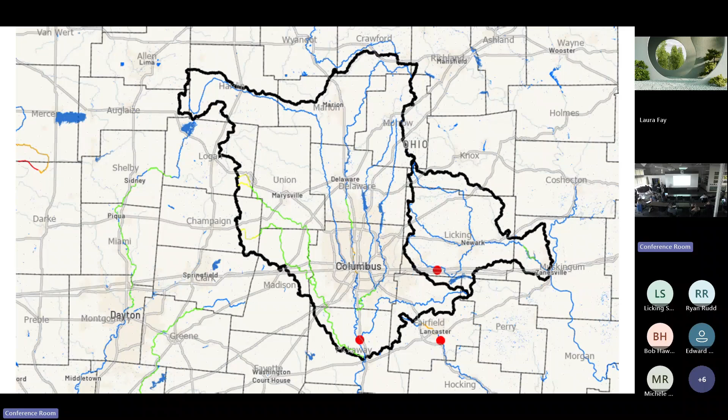Well, these are the projects that we've funded so far. I'm not going to get into the details on these various projects right now—glad to answer questions—but they're all floodplain reconnection projects. We've got 2 off-channel wetland projects, and a quarry reconnection project. These are great because they're scoring super high; they've got a million different benefits, and importantly, they're easy to sell from the volumetric benefit standpoint.

But that is not all that works. The reason these are the ones that have been funded is because these are the ones that people are bringing forward. We've got, frankly, a small handful of folks taking advantage of the opportunity, and we've got $4 million out in two grant cycles.

Which, by the way, it's worth stepping back and saying that if you think of some other grant opportunities, like the 319 program, it's typically $3 million for the entire state in a year. Or H2Ohio, before they pulled back from the Ohio River Basin, that was $5 million for the entire Ohio River Basin. This is just Central Ohio right now, and we just did $3 million in this last fund. So it's a big opportunity, and we're expecting it to grow.

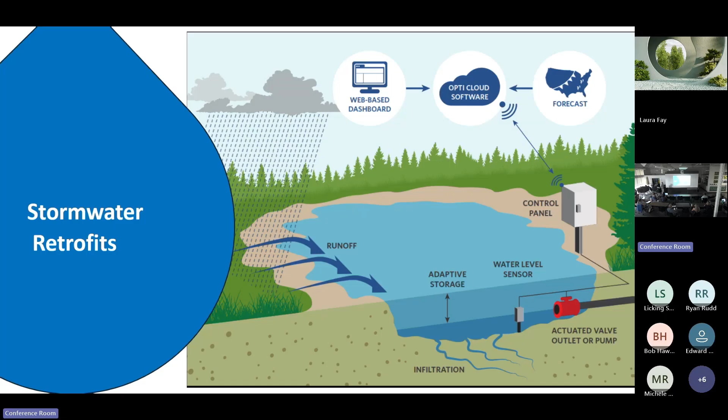Can they be done cheaper than that? I hope so, I don't know. But the detention basin retrofits that I'm used to working on, from the passive side, are a fraction of that, right? These can involve something as small as bolting a steel plate under the low flow orifice to restrict that, making a few saw cuts like we see on this control structure right here. Bob will talk a lot about that.

Obviously, whenever possible, we want to build a habitat, right? But to the extent that we can do these for, say, 40,000 instead of 400,000, I mean, I've got to think we can just fund these all day.

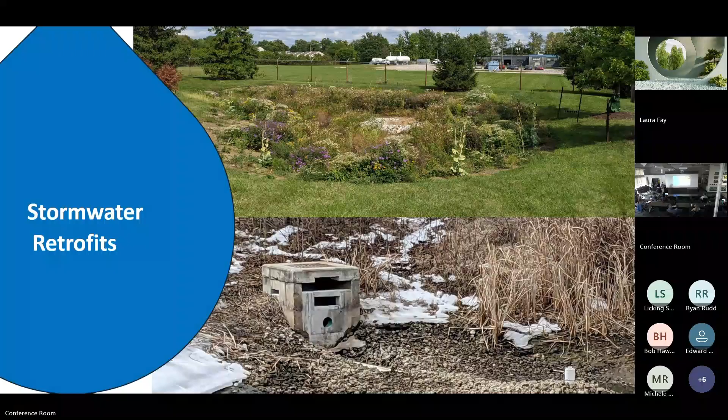So, my message here is let's do this, but let's also think big. So currently, if you read the NOFO, the minimum award that we're considering is 50,000.

Now, to be frank, that might be kind of hard to say. Might be hard to convince a corporation to invest their time on something so small when many of these folks are looking for hundreds of millions or billions of gallons of volumetric thing. And frankly, it's hard for me to sell internally to spend that much administration time.

The smallest award we've given out so far is 700,000. I'm not saying it needs to be a million dollars, but I'm saying let's think big. Let's not think about retrofitting a single detention basin. Let's think about retrofitting every detention basin in an industrial park.

And I'll just step back. I think a lot of folks like to do the detention basin at the school or the municipal building because it's easy. We know these people, we can go and we can talk to them.

In my former role, I spent all my time trying to work in one square. My goal was to figure out this question: how much does it take to mitigate the impacts of hydrologic alteration in a small area?

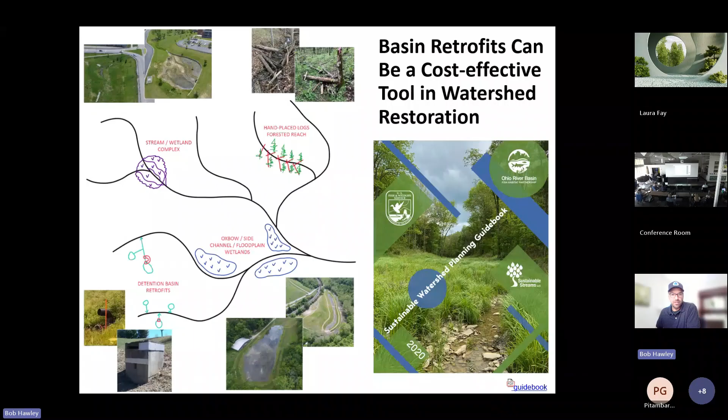And we've got this guidebook that we developed with U.S. Fish and Wildlife that goes into that. But today we're going to focus on the stormwater basin retrofits. And so the first question is why?

The history of stormwater management is that it's not been protective of aquatic biodiversity. It's not consistent with the goals of the Clean Water Act. So you basically take an undeveloped watershed historically and you develop it, and the pattern up until very recently was that you very quickly lose that biological integrity that you had prior to development, especially if it was a forested watershed.

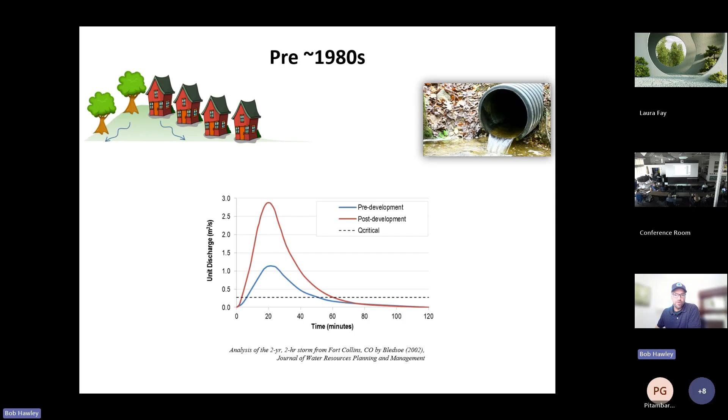And that's because of how we manage stormwater as civil engineers, stormwater managers. So you take that pre-developed hydrograph and you add a bunch of impervious surfaces, and you see the runoff volume and the rate of that discharge is a lot higher. It's a lot more volume, a lot higher than the peak discharge of the pre-developed condition, and that led to a lot of flooding.

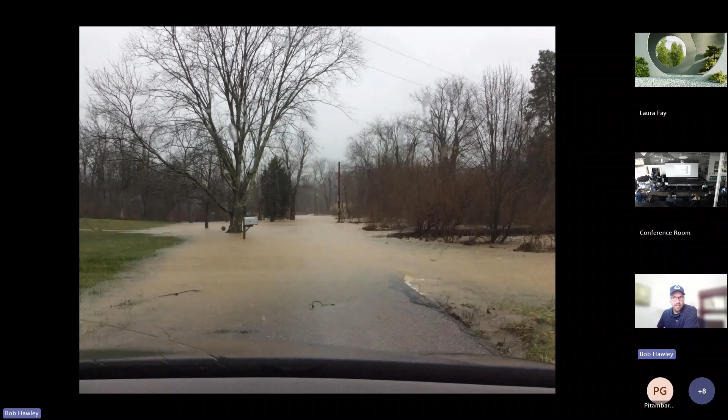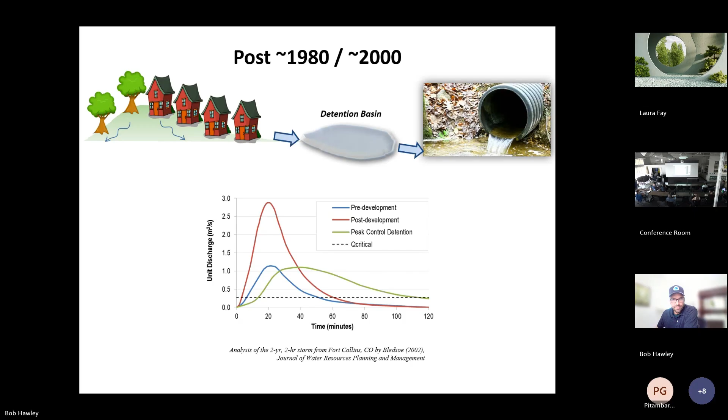Civil engineers said that's not good, and stormwater planners, conservation folks said this isn't good either, to have flooding. So what we did in the 1980s to about the 2000s was we started implementing peak control detention, where you've got extra volume running off, but you route that extra volume into a detention basin, and you don't let the peak discharge after development exceed the peak discharge pre-development.

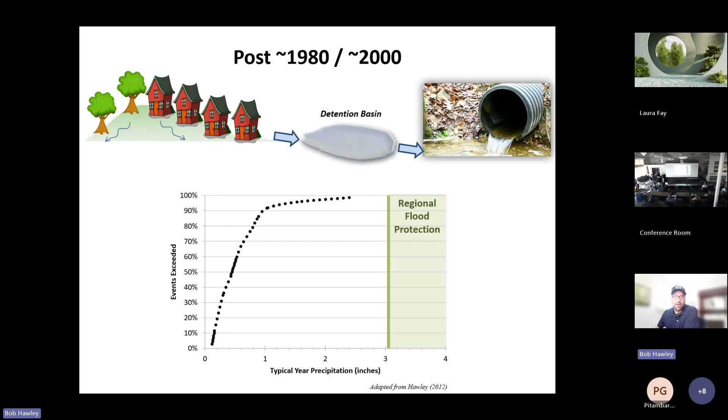In Northern Kentucky, that volume is about 3 inches. In Central Ohio, the 2-year storm might be a little less than 3 inches. But in general, pretty much all the storms in a typical year have very little attenuation. They're going right through the detention basins.

That led to things like this, where this is a developed watershed. The industrial facilities all have detention basins, but we get 0.3 inches in an hour and the stream looks like this, because the detention basins collect the stormwater but route it straight through. You can imagine how much damage that caused when you hit that on repeat - every time you get 0.3 inches of rain, your stream looks like this.

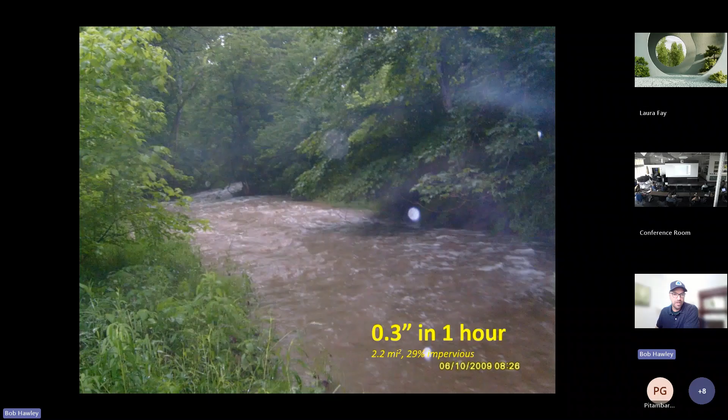The other thing is, when we don't really treat the runoff from these smaller initial storms, we have what's called the first flush, where you're getting lots of stormwater pollutants that go right through these detention basins and end up in our streams.

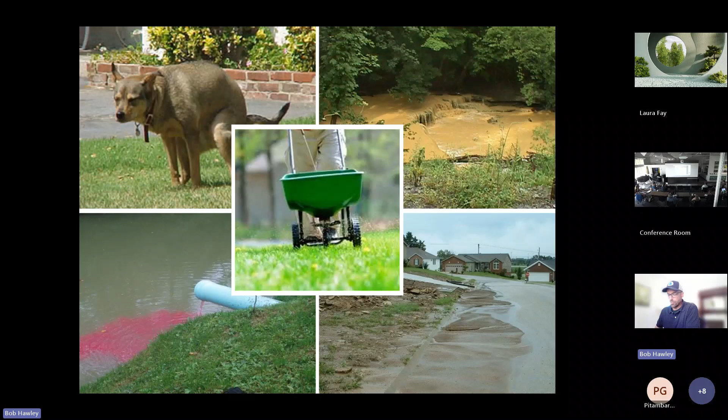Beginning in the 2000s in different communities through about 2015 or so, folks started implementing water quality volume criteria, where we said let's take a reasonable amount of rain, maybe the 80th or 90th percentile in a typical year, and make sure all of those events get routed through some sort of water quality BMP. For the large part, developers still have to do flood control, so they're still building detention basins.

So instead of a regular detention basin, you make it an extended detention basin with a sediment forebay and an underdrain release structure that slowly releases that water, makes it go through some gravel, and you get that treatment of the first flush.

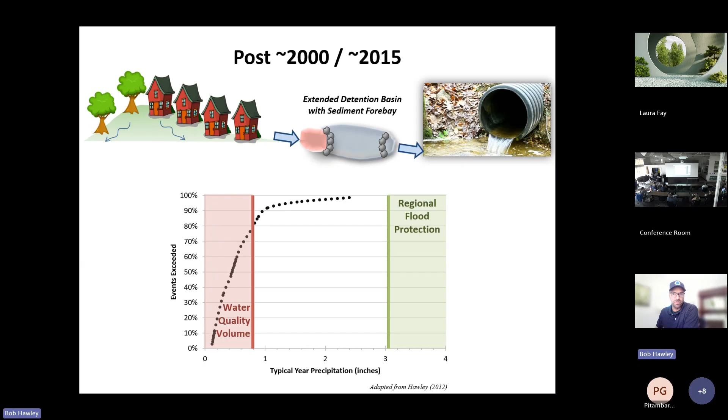You can take these and make them really pretty - you can make bio-infiltration basins with lots of nice native plantings and so forth. That was kind of the trend in the early 2000s.

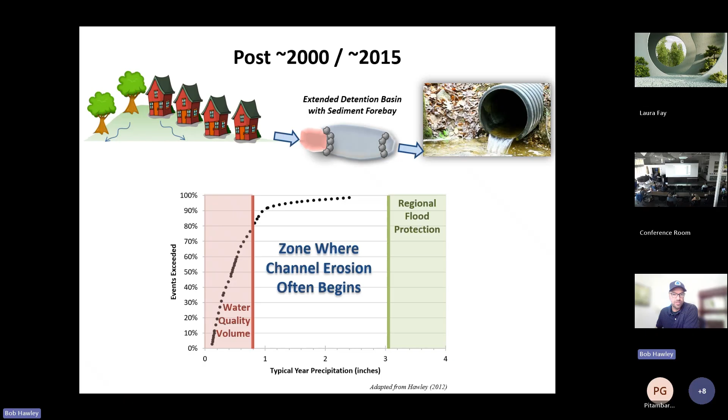But what we notice is that we've still got this gap of storms above 0.8 inches of rain but below 3 inches of rain. It'll vary in Central Ohio, but you get the idea - these storms are relatively unmanaged, and this is often where channel erosion begins.

That brings us to the critical discharge for stream bed erosion. This is the threshold discharge when the rocks on the bottom of the stream become entrained, they become mobilized. We've been studying this for a long time.

It's all the way back to like the 1950s. We've got a really good handle on what flows cause erosion for different sized particles. And this is a really important flow for not only erosion, but also the bugs that live on the rocks. A lot of those bugs have evolved to have life cycles that mimic the natural frequency of the mobilization of these rocks.

This dashed line on this graph represents that critical discharge, from one of the first papers on this idea back in 2002, from a Colorado study by Brian Bledsoe.

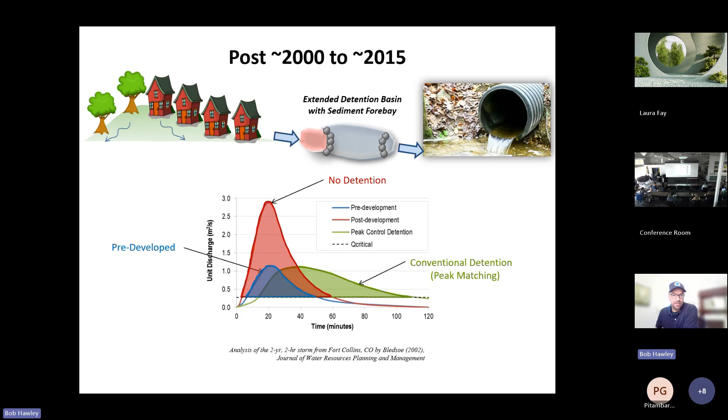What you see is this is our 2-year storm. We've got our 2-year storm without detention, and a 2-year storm with detention. And you see that if you look at that time and the amount of flow above that critical discharge, we have a lot more duration of those erosive flows when they occur.

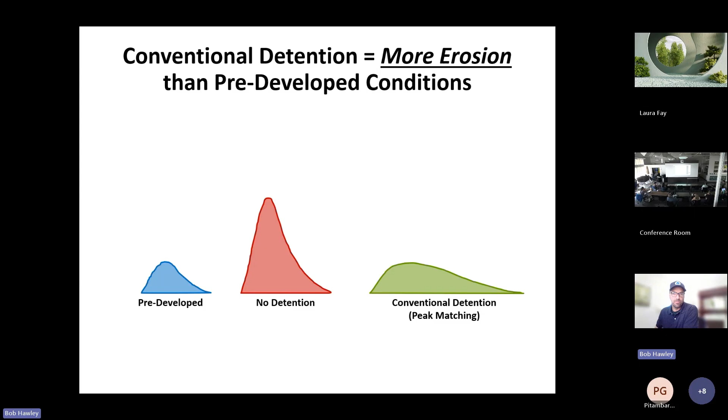And then we also have a lot more frequency of erosive flows. So conventional detention typically means more erosion than pre-developed conditions.

That can lead to stream bed deepening and widening, water quality impacts, and biological disturbance. So you start to mobilize the pebbles on the bed, and you do that over and over, and they're not replaced by pebbles from upstream or cobbles. You have the original stream bed, and then basically you've just made the stream deeper because you mobilized the particles that were on the bed - they're gone, so the stream gets deeper.

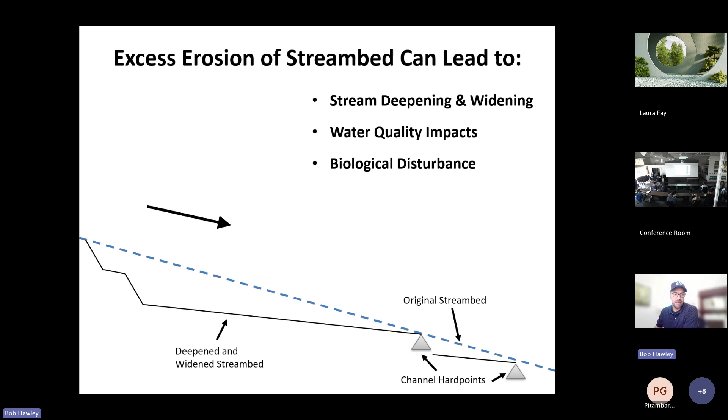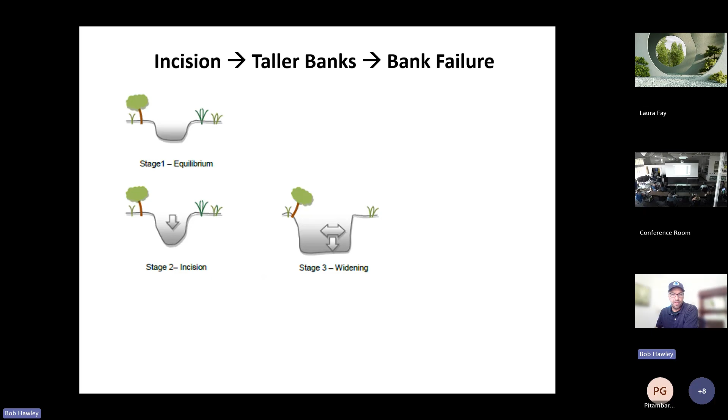That's when you lead to head cuts and all kinds of channel degradation trajectories where you get incision, and then the banks become so tall that you have widening because of geotechnical instability and mass wasting. It takes a very long time for a stream to recover, to the point the banks become so wide that the stream can no longer transport this material.

Benches start to redevelop and get colonized by vegetation, and you can recover to a new equilibrium. This is a natural process, but it takes a long time. And when you've got unnatural hydrology, it can take a lot longer.

So the point of these retrofits is, let's solve the root of the problem, which is too much erosive power in our flow regime. Let's try to restrict those erosive flows and see if we can induce a geomorphic recovery.

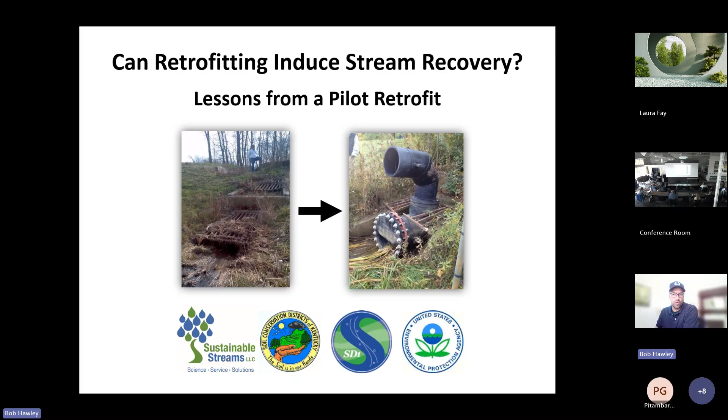So this was the first retrofit we did with a lot of partners, including US EPA. We basically took a 24-inch opening on a conventional detention basin and restricted it down to about an 8-inch opening. We gave it this bypass so that we have similar flood control performance for the big storms, like the 100-year discharge. Here you see it in action, where it's a simple change to the outlet structure.

You see the ponding just gets barely above the top of that pipe. Without the retrofit, this storm would have went right through that 24-inch pipe, but that 8-inch opening restricted the discharge.

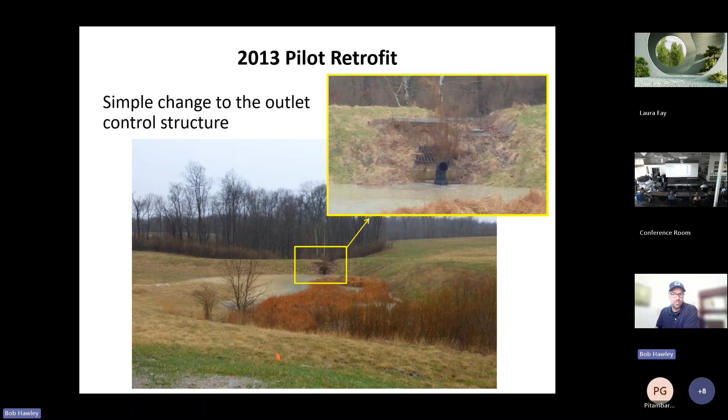So the idea here is you restrict as many flows, as many storms as feasible, below that critical discharge. And you need to know what the critical discharge is for your community - we can talk about that.

But for this first study, what we showed is for the pre-retrofit condition, even the 3-month, 6-month and 1-year storm, and all the way up, but even the 3-month storm was exceeding that critical discharge. And that means, again statistically, once every 3 months, we're hammering the pebbles on the bed, we're disturbing the macroinvertebrates.

Post-retrofit, we got the 3-month, 6-month, and 1-year storm to be released below that critical discharge. And the 2-year storm still exceeded that critical discharge. So it's back to a more natural disturbance frequency.

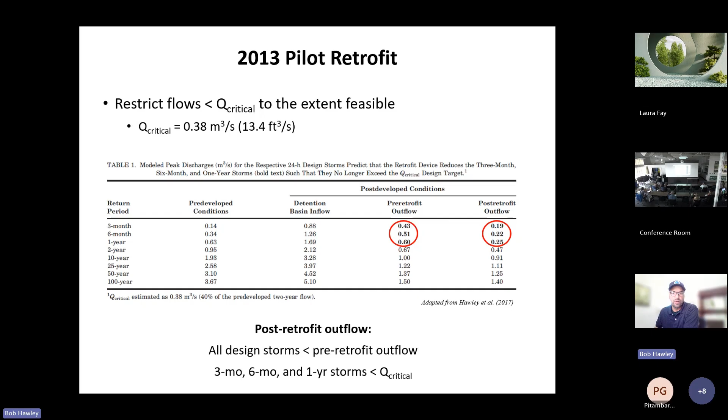Here's some monitoring of that. We've got basically our retrofit, and we call this the spur. We've got an upstream control site where we didn't have any retrofits, and then we have our downstream site that combines the flows from the restricted retrofit stream and the control site.

And what we see is not only are we making the high flows less flashy and reduced power, we're also extending the duration of base flows.

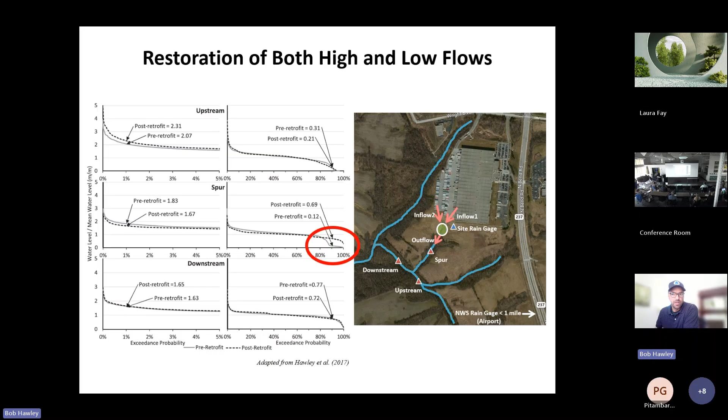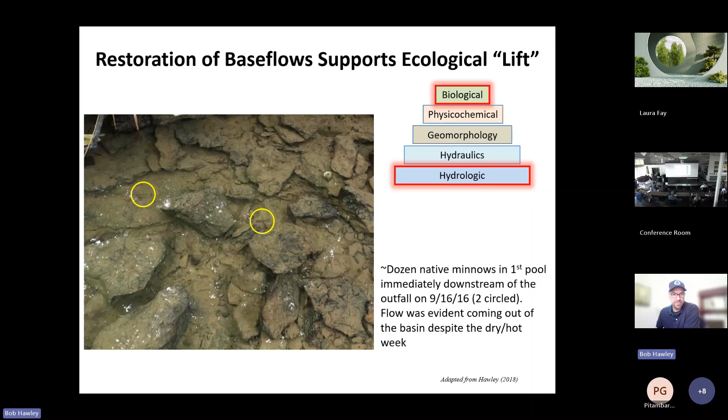So we're prolonging the flows during dry weather as well, by not letting the water just rip right through. And that led to fish in these pools that we had never seen fish in these pools before. So we're keeping these pools wet enough to support fish. That's obviously an ecological lift from a fish community standpoint.

We measure the bed material, and we actually see aggradation, which means we're no longer sending the pebbles downstream, but we're actually accumulating sediment along the toes of these banks. Whereas we see continued coarsening at the upstream control site.

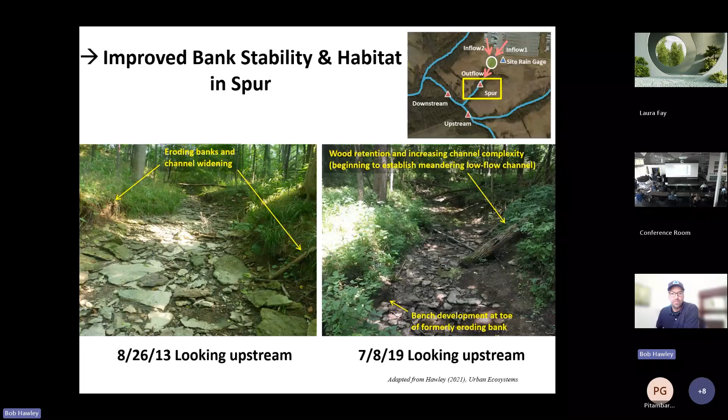Pictures kind of speak a thousand words. This is the photo of the spur looking upstream. We see bank erosion beforehand and channel widening, and then after the retrofit, we see vegetation of the toes of those banks and more of a low flow channel developing here. That was our spur site.

At our downstream site, we again see bank erosion before the project, before the retrofit. You see this tree with exposed roots. After the retrofit, the tree no longer has exposed roots. We see this bench that's developed along the toe of that bank, and it's getting vegetated. So that's really indicative of a geomorphic recovery.

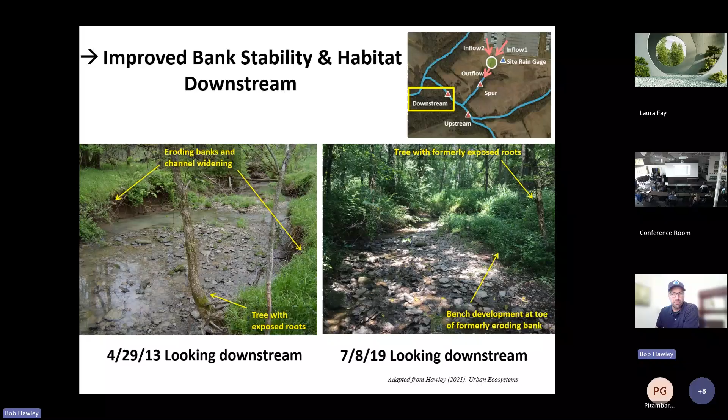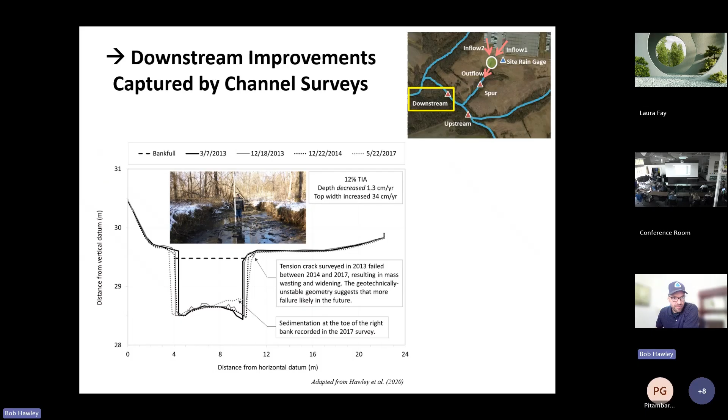If you don't just want to believe the pictures, here's some survey data that shows, before the retrofit, we saw all this widening. After the retrofit, we see this bench development, bar development that again was colonized by vegetation.

Our spur site is on a trajectory of recovery, as well as our downstream site. So we didn't retrofit the whole watershed, but we controlled enough of the total imperviousness for the whole watershed that even the downstream site saw benefits.

So we went from poor habitat to average habitat without doing any in-stream work, only touching the flows. We basically induced this recovery from degradation, down cutting and widening, back to aggradation over 4 or 5 years, and then that aggradation is stable long enough that vegetation can colonize it. So more of an equilibrium condition where we got stable vegetated benches.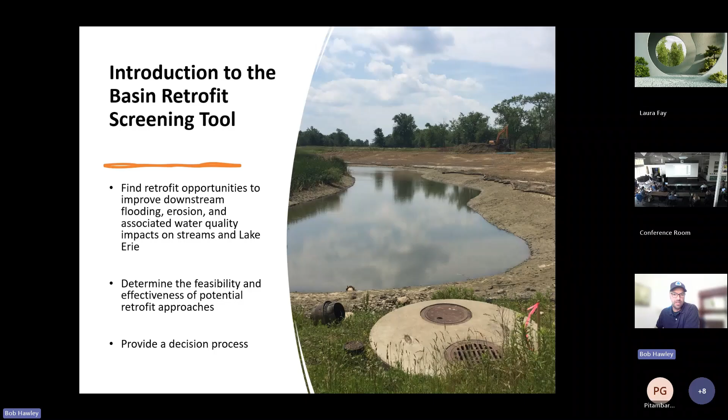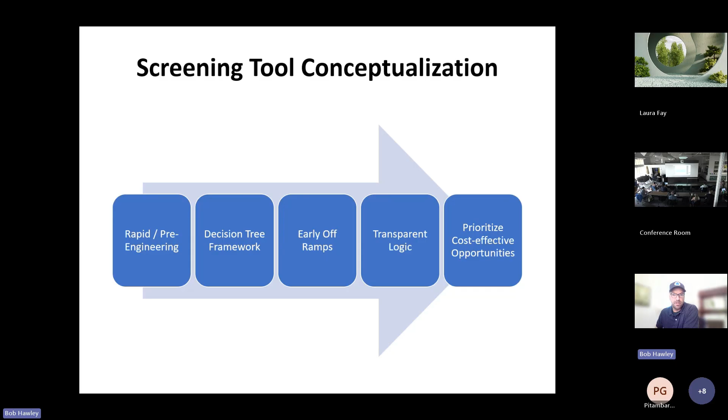We developed a screening tool so that other folks could help, so we could help other folks do this kind of on their own. Like what are the things we look for in a good retrofit candidate, a good candidate for detention basin retrofits? We did this with our partners up in Northeast Ohio, and we're trying to distill our experience in finding good retrofits and make it a transparent flow of logic.

And really prioritize those cost-effective opportunities. So you need some data to go into this, but for the sake of time, I'm just going to get to some of the key points here. So we got this decision tree, and the first - some of our off ramps we're trying to get to the high benefit, low cost.

This first off ramp is the highest benefit, lowest cost, and it's basically - I'll come back to it. But then we've got some other off ramps where it's high benefit, low cost. And then we got some very high benefit, but also high cost - so still decent on the cost effectiveness. And then we've got some kind of low to medium benefit, but medium to high cost.

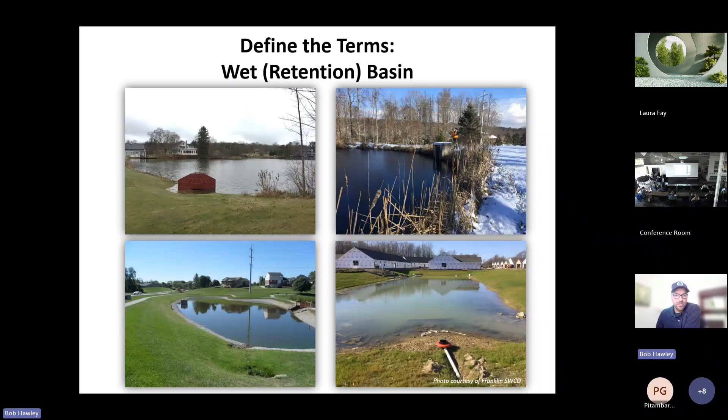That's where you probably don't want to spend your dollars, at least not right away. Okay, so the first question is: the stormwater control basin, is it a wet basin? And if it's wet - everybody knows what a wet basin is, it has a permanent pool, right?

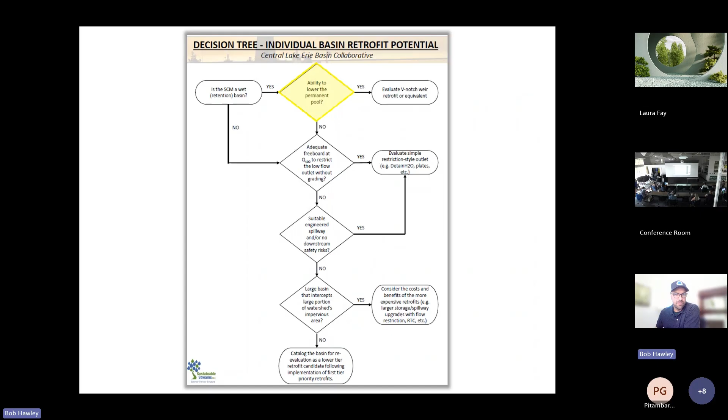If it's dry, it doesn't have a permanent pool, right? Everybody knows that. So if it's wet, do you have the ability to lower the permanent pool? Here's our permanent pool, or some people call it normal pool, but basically it's the elevation of the lowest orifice. So the bottom elevation of the lowest orifice, that's the permanent pool elevation. And if you have the ability to lower it, even just a few inches, can be a real benefit, and it's often imperceptible.

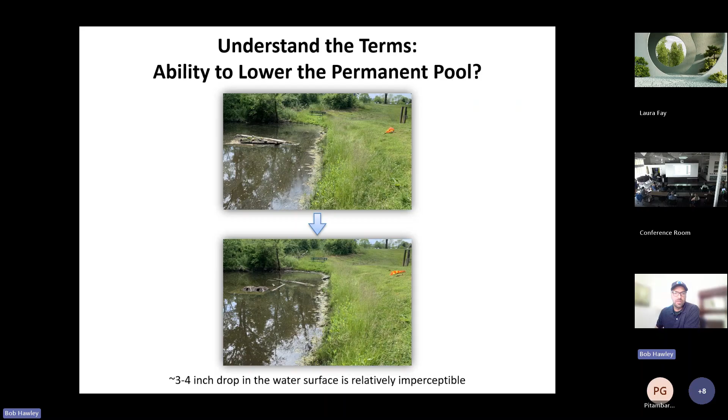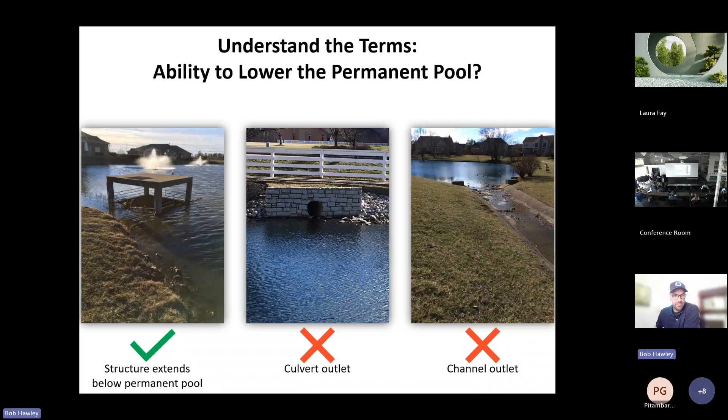So if you have the ability to lower the permanent pool, how do we understand that? If our outlet is a concrete channel, or a stormwater pipe, we don't really have the ability to lower that in a cost-effective way, because you'd have to replace this whole concrete channel or this whole pipe. But if you've got an outlet structure that extends below the permanent pool, and your outlet pipe is somewhere underneath this berm that's lower than the water surface, you do have the ability to lower that permanent pool. So that's a yes.

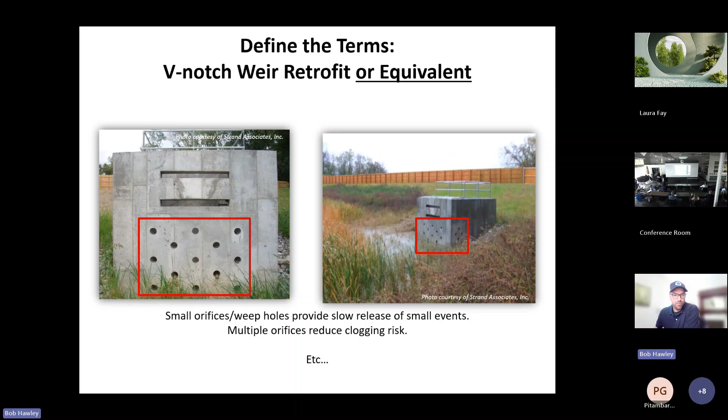But the reason that is a no-brainer, as long as the folks are okay with you lowering the permanent pool elevation, is you haven't increased the risk of overtopping. You haven't really done any of the other things we're going to talk about. It's simply that you've opened up more storage, more freeboard available for storage, and you've got a slow release instead of a really big open window right away, compared to just this V. That is kind of the simplest, lowest cost option you can find.

It's not necessarily that you have to hit it in every retrofit, but the idea is, let's say some designer had 1.5 feet of freeboard, or 2 feet, or even 4 feet of freeboard. You've got the ability to basically restrict smaller storms, use up some of that ponding for smaller storms, and then you've increased the freeboard during the 100-year, but not so much that you're taking risks or going above the standard of care.

Again, typically most designers target 1 foot of freeboard - you have to check the rules for Central Ohio. If the drawings or stormwater calculations from an existing basin showed more than 1 foot, then you know you've got the ability to retrofit.

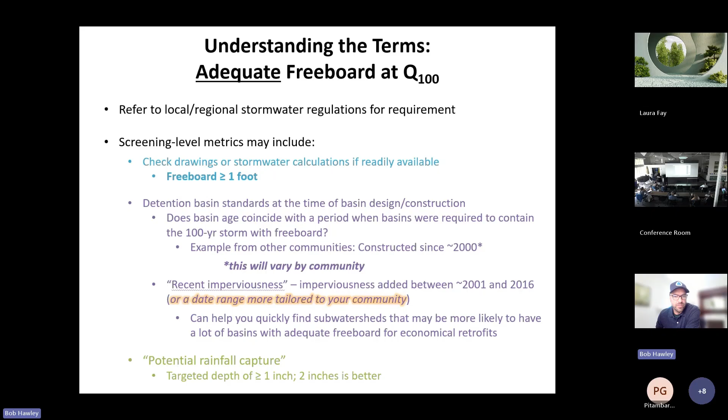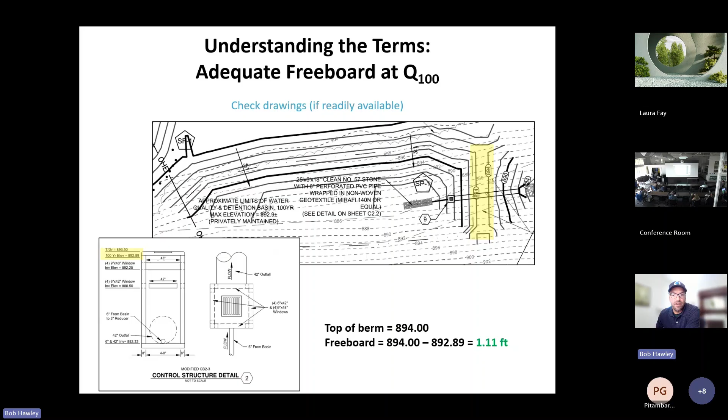We've got other kind of tricks we can get into, but I don't want to take up too much time. The main thing here is, like this one, you've got the 100-year elevation at 892.89, and the top of berm is 894. So you've got an extra 1.11 feet of freeboard. That might not seem like a lot, but it could be the difference between restricting the 1-year storm below Q critical versus keeping the 3-month storm and exceeding Q critical. So you can often gain a lot by just a little bit of freeboard.

So, again, reviewing drawings - there's going to be some basins where there's no freeboard or negative freeboard, where the 100-year already overtops the spillway. And then there are other basins where you're going to have freeboard to work with. That's a real quick, easy screening that helps you understand whether you have a low cost option here, or a potentially high cost one where you've got to grade it bigger.

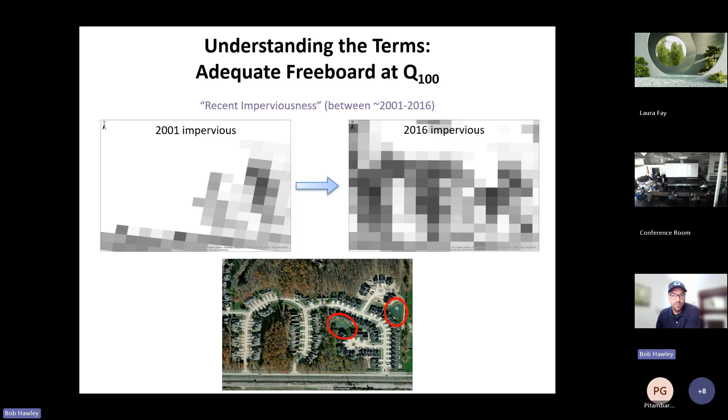This is one thing we often use when looking at potential candidates, and it really varies by community. What you're looking at for low cost retrofits are typically stormwater basins built with flood control, but probably without water quality or more modern flood control measures. Depending on when the rules and regs were rolled out in your community, you can target when the imperviousness popped up in the national layers. If you know development went in at a certain time, you can quickly identify the neighborhoods likely to have these basins that probably aren't restricting erosive flows enough, but are big enough to potentially restrict more flow.

I'm going to skip this — it's a little trick, but we're running out of time. One thing I really wanted to cover, though...

If you don't have enough freeboard, the next question is: is there a suitable engineered spillway? And what are the downstream risks?

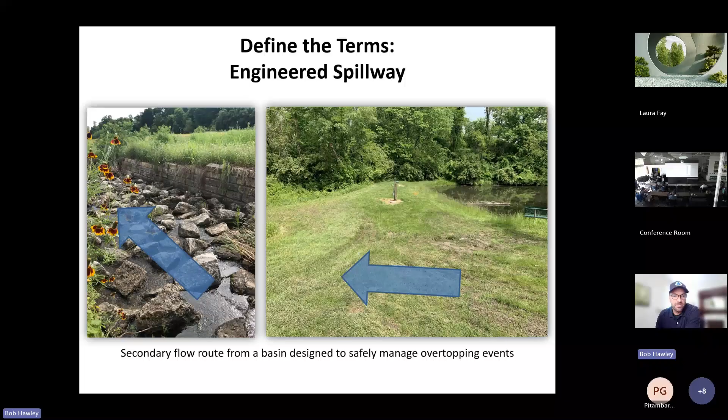Here's an engineered spillway — it's got armor, protected banks. This spillway is designed but just has grass. This one can handle pretty intense flows, while this one can handle more of a trickle, just a little depth going over. This is a berm, clearly made of fill, so you don't want to send a lot of extra water over it versus an armored spillway like this. Some others, like this one, have an armored spillway, but it's not in good shape.

The downstream end of it ties into a stream that's totally eroded. So this has issues that need to be addressed, but it won't be a low cost retrofit — it's probably got to be addressed by the basin owner already.

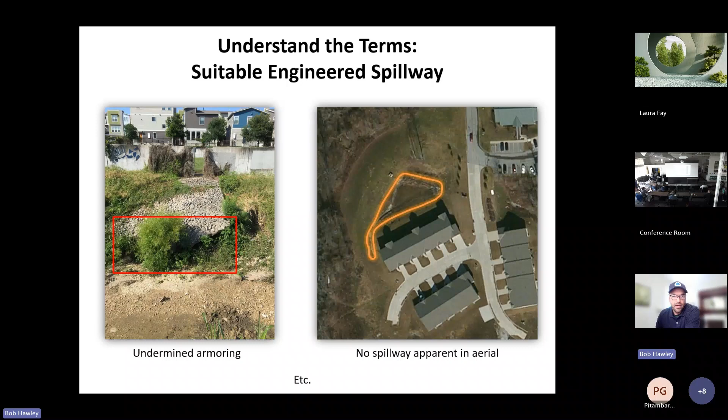But if it's more of a sunken depression, where there's no real spillway but just kind of a pond that continues to flow out, it's not really like a classic berm — that's a lower risk situation. So you just want to think about where that water goes if it does have to go over the spillway.

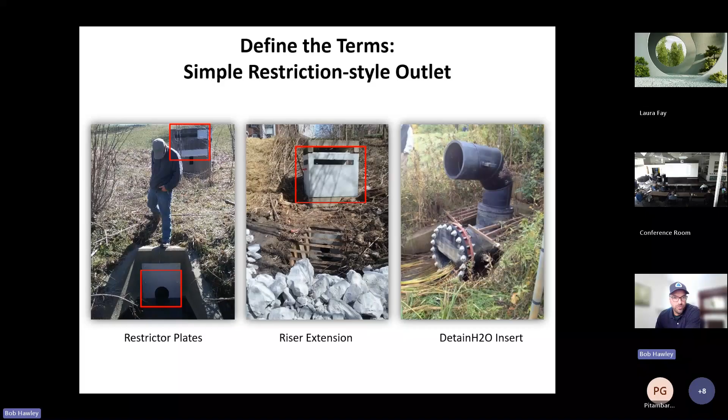If it has a suitable engineered spillway or adequate freeboard, then you evaluate the simple things Adam showed earlier, like plates around the low flow outlet and maybe plates on some of the weirs. In this case, we extended the riser because we had more freeboard for this basin. This is our first one — we call it the DetainH2O, a pipe insert. Very low cost to restrict as many flows as possible below that critical discharge.

The last decision point is whether it's a large basin that intercepts a large amount of the watershed's impervious area. Here's an example we found in Northeast Ohio working with partners. This basin intercepted 32% of the imperviousness, 72% of the total imperviousness of the watershed, and 65% of the total drainage area of the watershed.

This isn't a low cost retrofit, but because it intercepts so much flow, it would be a good candidate for one of those more expensive real-time control structures that Adam mentioned. It might cost $200,000, but that's better than retrofitting 20 low cost basins.

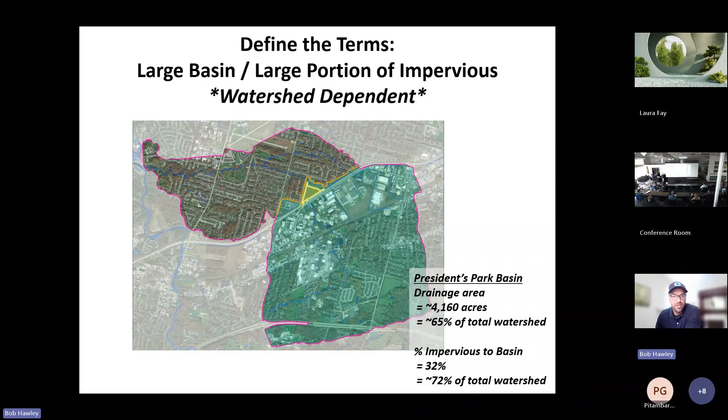Anyway, that's where it does make sense - it is high cost, but it's a very high benefit relative to the scale of the watershed. Real-time control could be super high cost, multiple hundreds of thousands of dollars. Some other higher costs, but not that high, include adding under drains with a lot of gravel, adding new outlet control structures, and doing more grading. All of those things can add cost compared to simple retrofits, but they might be worth it if it's a basin that intercepts a lot of your area draining to your stream.

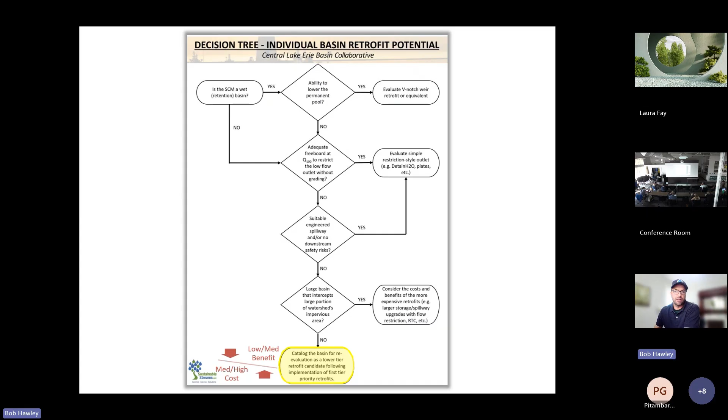And if you did all this work and found out it doesn't check any of these boxes - it's basically low-medium benefit with medium-to-high cost - we just catalog those for later. It's not like you give up on them, especially if you've got a really eager property owner, or if it's the last piece in the puzzle for a pilot watershed. Maybe it's worth spending $80,000 to expand the footprint and finish out your pilot watershed.

I think I'm running out of time, but one thing to keep in mind - a lesson we've learned from a lot of implementation - is that you're going to have to figure out the magic number in Central Ohio by trial and error. What we found is that if we can effectively manage 25 to 50% of the impervious area in a developed watershed, we are seeing those geomorphic recoveries. It might be different in Central Ohio, depending on the timing of development and so forth, but that's a good target when mapping out planning. It's going to vary by community.

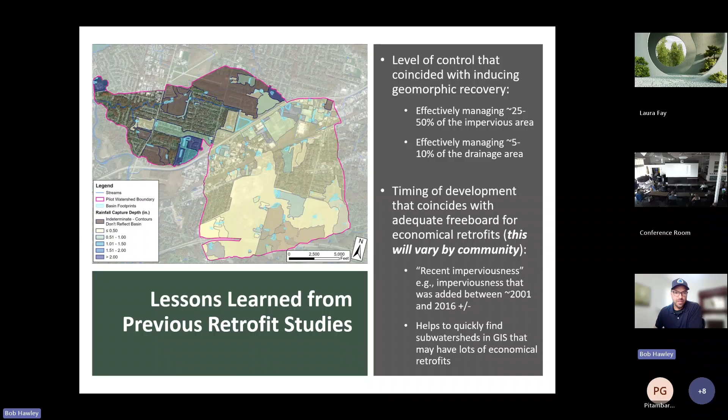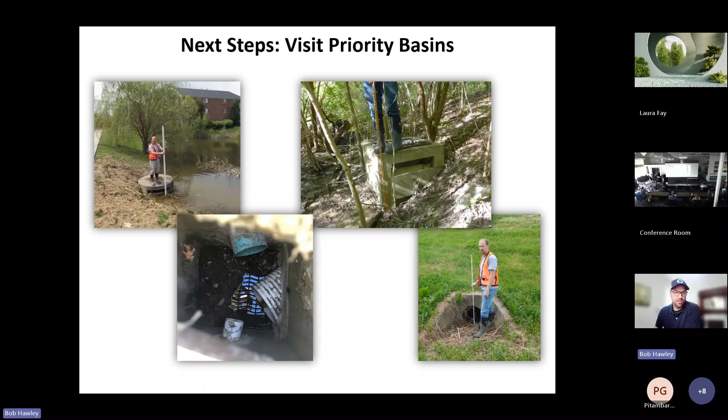This is an example where we got a lot of scour right here at the outlet, so if we're going to be out there anyway, maybe we address that outlet. You see a head cut up here that's undermined this outlet, so maybe we add some rock as part of the project to head off future issues.

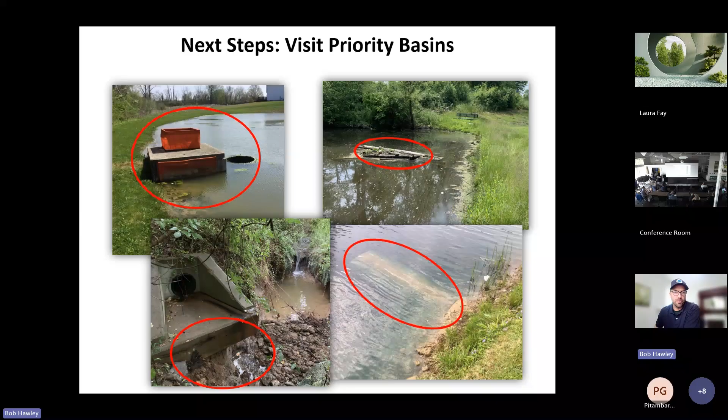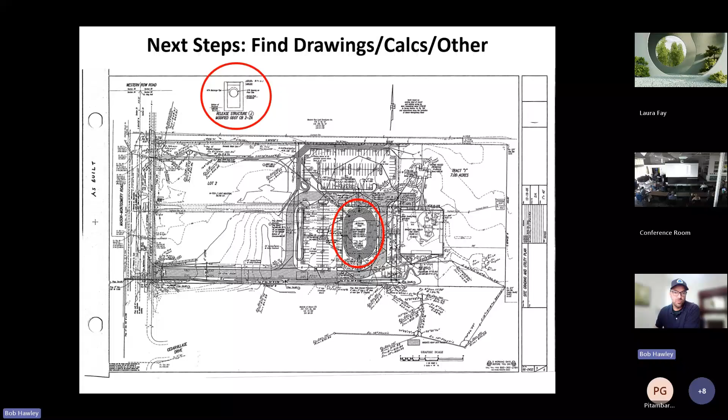The existing drawings - if you've got a partner who reviews a lot of the stormwater detention basin plans, like a conservation district, and they've got them in-house - those can really come in handy and speed you up, as far as what the initial calculations and freeboards associated with those basins were.

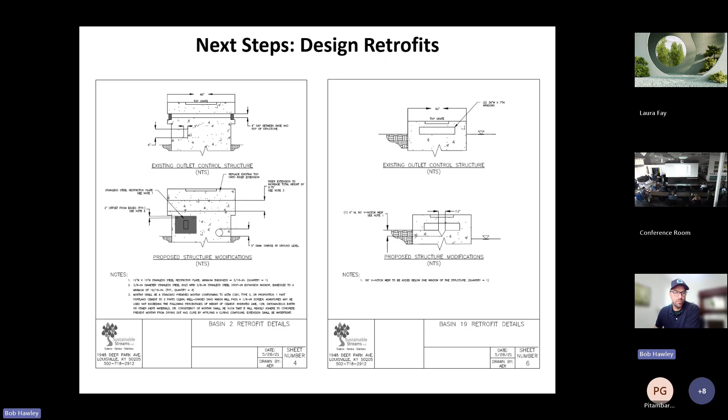And then ultimately you need to model and see how many flows you can restrict below Q critical, and what you can get with the V-notch weir - how deep it needs to be, how big it needs to be, what we need to plate, and so forth. But here's what I wanted to end on.

The general goal, especially if stream erosion is your problem - which I know in Central Ohio it is, in a lot of streams - is to restrict as many design storms as feasible to be less than that critical discharge. Critical discharge varies by region, and it can even vary within a region depending on the stream bed.

But in general, we've worked in several communities. Here are two examples: in Northern Kentucky, the regional representative critical discharge is about 40 to 50% of the 2-year discharge, the undeveloped 2-year discharge. Whereas in Austin, with a lot smaller gravels in those streams, it's more like 2% of the 2-year discharge.

Turning that into rules and regs for target on new detention: what we say is, do stormwater flood control, do the water quality you already have to do, but then take every storm up to and including the 2-year storm and make sure it's released below this critical discharge. If you do that, you get the same erosive power in a cumulative sense that you would have had under pre-developed conditions.

In Austin, it's different - you take the 2-month storm and release that below the critical discharge, which is 2% of the 2-year peak discharge, and you also do the rules and regs related to flood control and water quality.

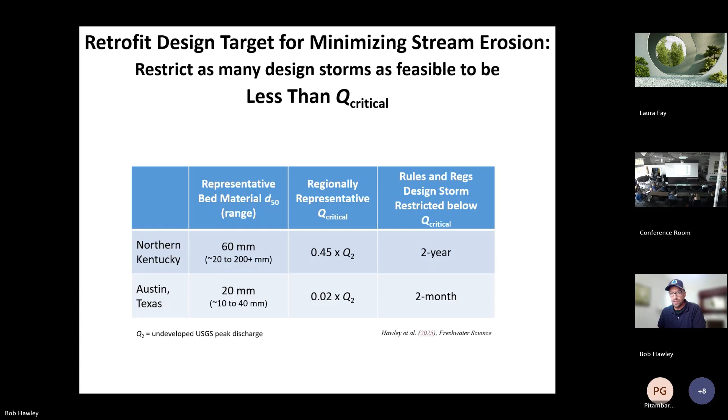So again, it's one piece in watershed-scale restoration, but that's what we have. No matter what you do, I recommend piloting it, monitoring it, and assessing it, even if it's as simple as a photo from the same spot, so you can tell visually if it's inducing geomorphic recovery or if the banks continue to fail. So those are some of the lessons we've got.

And if we have time for questions, I'm happy to take them.

Do we have any questions from anybody in the room or online? None. I'm going to make sure internet is working. Can you hear us all right, Bob? Yes. Okay.

All right, if we don't have any questions on Bob's presentation, thank you. We've heard a little bit about basin retrofits, how they work, how to identify them, their benefits for streams and other natural environments. And we've heard about some new opportunities for funding these. So I'm not sure people needed much convincing on basin retrofits or restoration projects, but we'll hear a little bit from Kyle on how to sell it to governmental partners and the community.

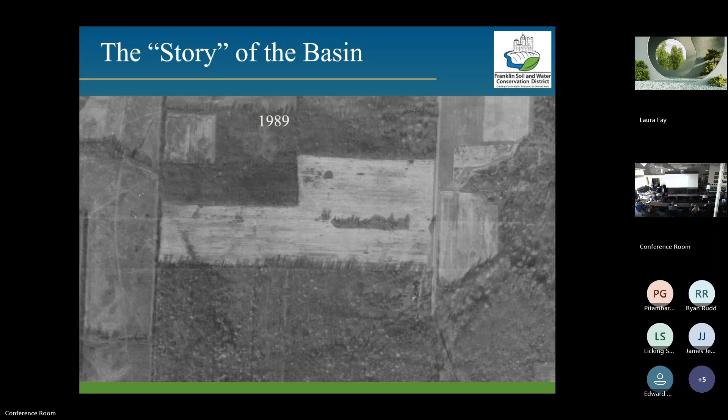You can see pre-development, it was just kind of out in this agricultural field, most likely wetland soils, very traditional detention basin. It was developed, so we were designing back then for water quantity. We didn't care about quality. Who cares about fish and bugs and what goes on downstream?

There were a couple inlets to this basin. During low flow, these concrete channels essentially delivered groundwater and any small events straight into these concrete channels and straight out the basin. So really, in all but our larger storm events, this basin was effectively doing nothing for water quality or water quantity.

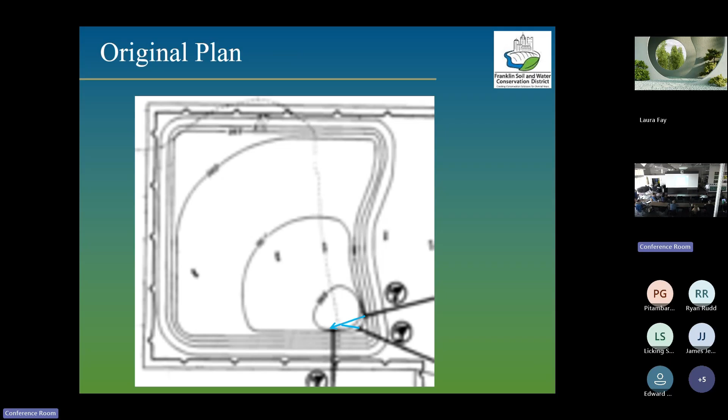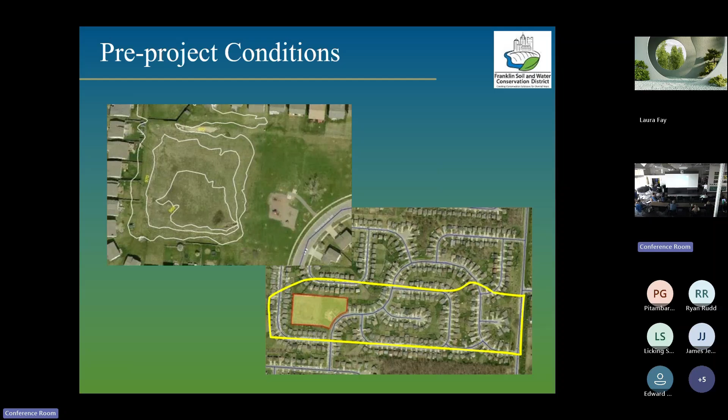So we started looking at it and saying, okay, what can we do here? Well, we've got a park setting, we've got a little playground and things, and then this is the open space for the community kind of around it.

So we started talking about what could be done to improve it. Well, we had some hurdles to overcome. We had Columbus Parks and Recreation, who were operating this park as they have for many years, and so they were reluctant to change.

If I'm out here in the basin area, which is kind of all of this out here, what's that maintenance going to look like now? Before they just came in and mowed it.

The folks who have to take care of the infrastructure, they were looking at it and they're just like, well, we've just got a pipe to come down, we've got an inlet. What's the new basin going to look like? What type of maintenance schedules are we going to be on?

So again, the previous condition was just this channel that went from inlet to outlet, and then it was a weedy, muddy patch of the rest of the basin. They could maybe mow it 2 or 3 times a year, so it wasn't looking manicured or intentional.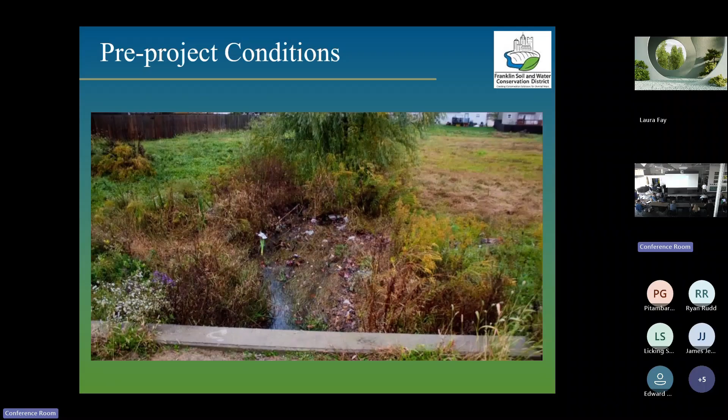So all in all, this really wasn't working for anyone. So we started talking to them, thinking about design, thinking about what would be best for Dysart Run. This is a tributary out in the Reynoldsburg area that literally has had houses condemned because of downstream erosion, banks failing and houses being unsafe to live in. So there was a lot of work to do.

Sorry, I have a problem. So we wanted to treat stormwater, we wanted to slow stormwater, reduce the volume, and create a more attractive area for the park. So we started putting together all these goals for alignment in this project.

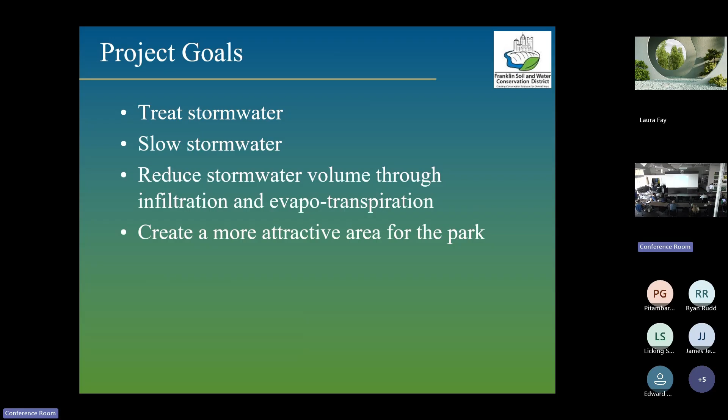And what we came up with for design was essentially a design that would renaturalize the area while both increasing our quantity that we could store there, but also working on that quality.

So instead of having an inlet going straight to the outlet, we created a design where the initial flush would dump into a micro pool that City of Columbus could then put on a maintenance schedule for all your sediments and things you don't want ultimately leaving this site eventually. So it exists in a forebay and a micro pool there.

Then we created berms to create the flow pattern differently in this basin. So instead of that maybe 75-foot direct-to-the-outlet channel, we now have a routing of this basin that goes around these berms through vegetation and then ultimately back into a micro pool before the outlet. And what we found with this was, because of this sinuous path to the outlet, much of our rain events never leave this site now.

So all the groundwater coming from sump pumps and things like that are still running this time of year, those are going into the forebay and eventually infiltrating before they get in. Even our smaller storms will never reach that outlet, so we're still getting all that capacity in the big events.

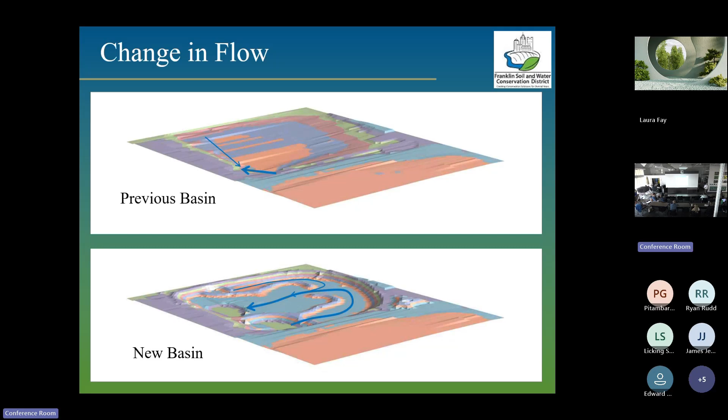So now this fills up and actually has more storage volume than in the past. But the real benefit is that it's infiltrating a lot of the flows and no longer impacting downstream. On top of that, we started working into the design that amenity aspect, instead of just a grassy, weedy patch, we can create something different here.

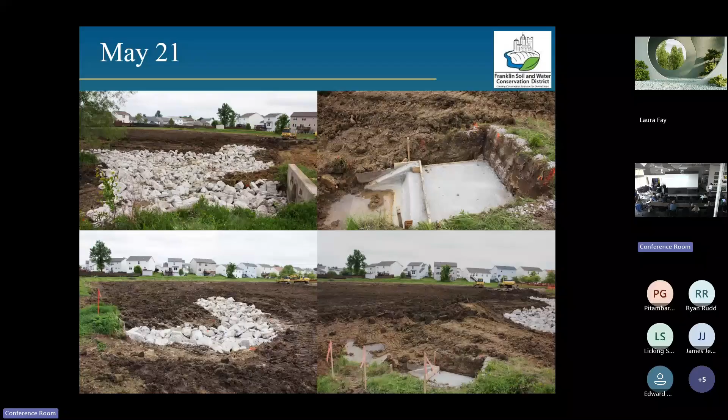I'll probably skip through a lot of these slides of construction and things, but you can kind of see what the project looked like as it was getting placed in there and some of that routing.

It took a lot of pictures. We deleted a lot of pictures over the years, but they're still in.

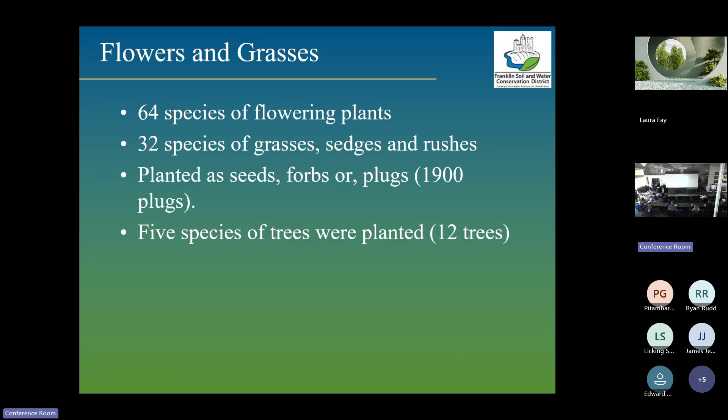But then we came in and started making it prettier essentially, right? To us, it's providing ecological lift to the residents that live around there that don't know any better. Hey, we've got flowers and pollinators and insects and things like that. Kids can go capture frogs and things like that.

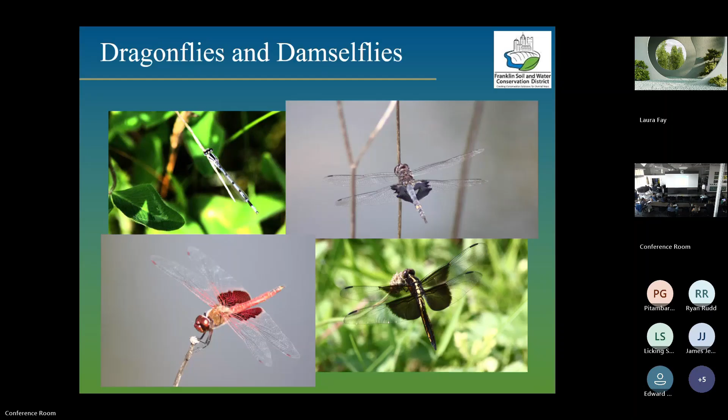So just clicking through a few more of these, we'll have some photos of what it looks like at the end here eventually.

So again, on this Oak Ranch or on this Crawford Farms, and Annabelle, you can switch over to the Fieldstone project while I'm talking. Again, the people we had to convince about this one were less the residents around it, right? We had to talk to them about, okay, is this going to increase the mosquito population? We pointed to data that says if you have natural habitats and you bring in the insects and everything else, you're going to reduce that mosquito pressure as opposed to the ruts and things that are sitting there.

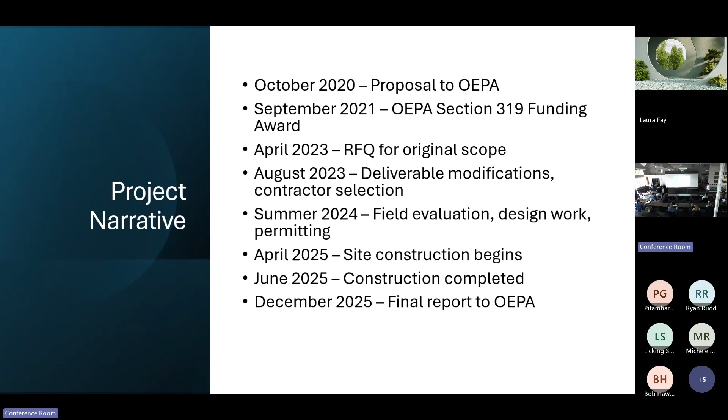So we came in and started looking at things, and said, okay, if flooding on the southern parcels is a big issue, and we're seeing erosion from the flashiness upstream, what are some solutions we can come up with? Originally we looked at this project for a wetland treatment train and things, but funding dictated otherwise. So we said, all right, restore the floodplain, get more storage for the storms on site away from the residences, and do stream channel improvements that will essentially reduce that erosion on site and slow water downstream. So we started looking at this and said, we've got an idea for this restoration.

Jefferson Township, our partner on this, was completely on board, 319 on board. Now, as we started to go in and talk to the residents, they kept pushing back. We couldn't figure out exactly why at first, but what it boiled down to is no one likes change, no matter if that change has a lot of good for it. What a lot of these residents were worried about was, one, that we were going to make things worse—that's always the initial problem. You've got to prove to them that if you're making more floodplain, that doesn't just mean more floodwater coming towards my property and my house.

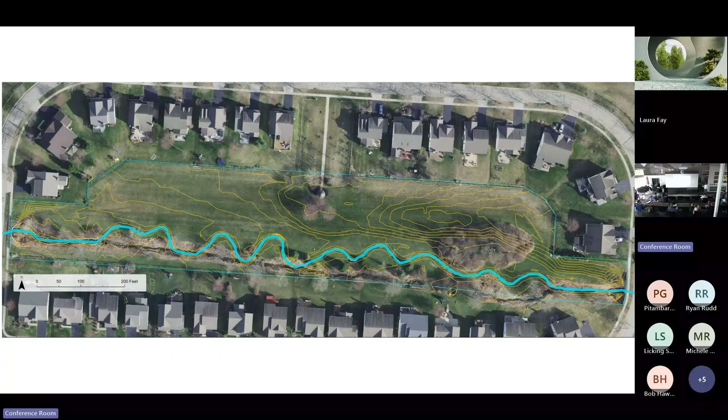So again, it was just communication and outreach to the residents saying, hey, here's the design. Yes, we are going to spoil material in certain places because we've got to excavate a lot of floodplain—here's where it's going to go, though, and this is what it's going to look like afterwards. And also, we hear you—we're going to leave the area where the kids are playing soccer and doing this, that, and the other completely untouched, so we don't even have to worry about messing that up for you, and get through those hurdles.

With that, we were able to come up with a design, moving the channel as far as we could under the budget constraints we had. We moved the channel away from the houses, created floodplain, and staggered it essentially to be away from the houses as much as we could, so that we're moving and shifting that high flood water.

These folks are still going to see that in the largest events, but it's going to minimize that. And then we came up with a design that had a riffle pool run design and created a lot more stability here, so we're not going in with that long-term instability that residents see as erosion and a big problem. We're fixing that for them.

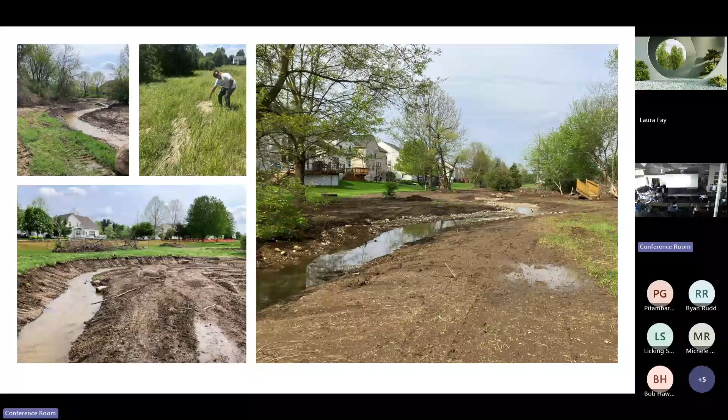On top of that, again, all of our projects, we put in a lot of thought. If we're dealing with a restoration site that's 200-300 acres, we want that natural, right? You might have access for some fire breaks or an access point where you park, things like that, but other than that, we want that whole site going natural.

In instances like this, we know we have to be more intentional with our design. We have to allow mowing in certain areas so that it can keep appearances. We even made exceptions - and there's Henry who ran this project - to allow mowing to go down to the stream in certain areas, so that we can allow access to some of the riffles.

The kids can get in there now. They can cross this, because of the new design it's a much narrower channel and lower depths through our riffles and pools. They can walk across this now. The kids can be in it. A lot of the residents, even though it wasn't their property, their solution used to be to build bridges across this in the past. There's no need for that now.

In low flows, we've made it accessible and they can get across in certain points.

Again, as Adam creates funding opportunities, as Clean Ohio continues to have a lot of success for acquisition and restoration, 319, all these other grants - it's less and less our hurdle just being funding. So we have to think about how we can sell these projects as amenities.

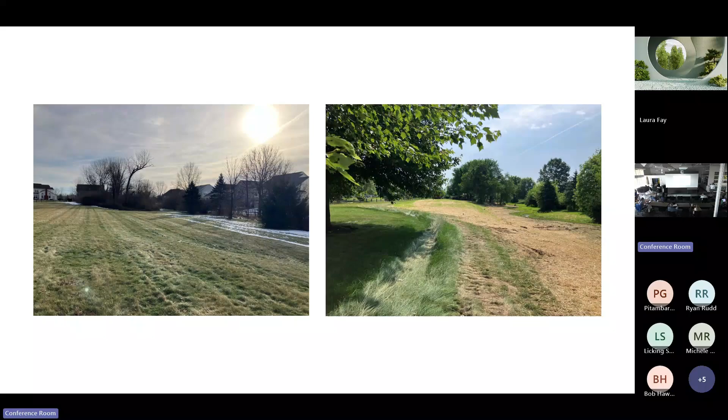One of the big stream restorations - and my clicker's not working anymore - is in Hilliard, Clover Groff runs along there. That was a ditch, much like any of the other ditches out there 20 plus years ago. Millions of dollars have been spent in that watershed alone to restore Clover Groff. One of the sections is Spindler Franks Park, City of Columbus Parks and Rec. They did thousands of feet of restoration through there, and in conjunction with that, they acquired a lot of land to do that project.

So now we're looking back 20 years later, and some of the criticism in that watershed in particular is that these streams aren't performing exactly like we had anticipated or what was sold. We were told, all right, we're going to build these streams doing natural channel design, they're going to function as streams. Well now 20 years later, we know that there's not a lot of velocity going through there due to the flatness of that area, and a lot of these riffles are filling in.

So they might be there, but they could be buried in some substrate. Some people are looking at those projects based solely on that QHEI outcome or other parameters, and they're saying, well, maybe this project wasn't a complete success.

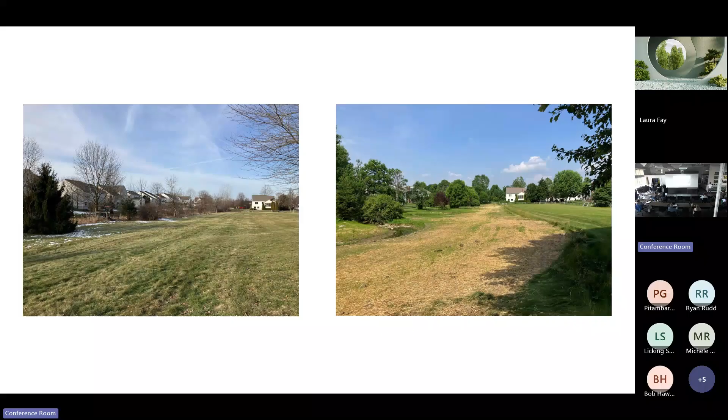But if you go out there now and walk that area and look at the stream corridor and how it's changed, we've got buffers on each side of hundreds of feet in most areas. The vegetation is now maturing, you've got 20-foot tall trees shading Clover Groff, you've got riffles and pools even though some of them might be sediment laden. But you've also got this natural area that thousands of people a day are now using - it's got a multi-use bike path going up and down, and access from different communities where they can, on foot or on bike, get to these natural spaces within a couple of minutes walking instead of loading into their car and driving to the metro park.

So I think, looking at it, our restoration work and our retrofit work - yeah, we're the nerds that are going to look at water quality and bugs and fish and things like that, and that's going to move us. But we really have to start getting beyond that for the general public, and quite frankly, for the folks we're going to have to work with to get these in. The engineer at City of Columbus or the maintenance guy or things like that - they just want to do their job, and they've been doing it a certain way.

We've got to find ways to communicate what needs done and why, and get that buy-in from all these different stakeholders in order to get more and more of these on the ground. So that's my spiel. Any questions on hurdles or the importance of community or stakeholder engagement?

I was curious if this were done with funding related to the volumetric water benefit, would the calculated benefit be the full volume that passes through that stream length post-restoration on an annualized basis, or how is that calculated? It's all annualized.